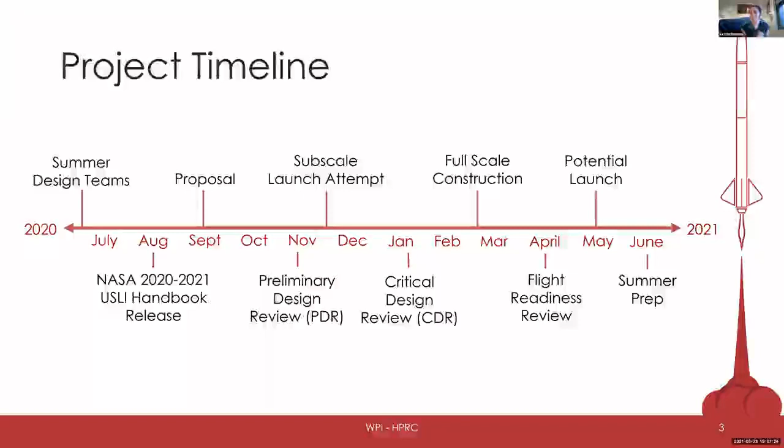Although we are a competition team, there are many goals the team strives for every day. Mission design and execution not only pertains to the requirements set by the competition, but also internal design goals we set ourselves. Each year, the team chooses 1 or 2 new major tasks they would like to add or improve upon to the rocket and/or payload. It is not only important that these designs are well thought through, but well executed.

This provides our members with the full engineering cycle experience, since they see the project from concept all the way through to fruition. Throughout this competition, there are several design reviews, the most recent being the Critical Design Review, or CDR, being 336 pages long. As engineers, it's not only important to create, but also to effectively describe the idea and document its journey. This extensive record of our project can be beneficial in many ways, namely for future members of the team.

Education and engagement is crucial for our team's sustainment and also for the community and members' benefit. The team participates in several outreach opportunities throughout the year to give back to the STEM community. This project is a place where students can put concepts they've been taught in class into practice in addition to learning hands-on. The team holds workshops throughout the year, ensuring that new and returning members alike learn something new and improve on their technical and professional skills.

So I'll be taking you guys through an overview of the vehicle we're launching. This year's rocket is a little less than 10 feet tall and weighs nearly 50 pounds on the pad. It flies on an L-class solid rocket motor, with which we'll reach an apogee of about 5,000 feet.

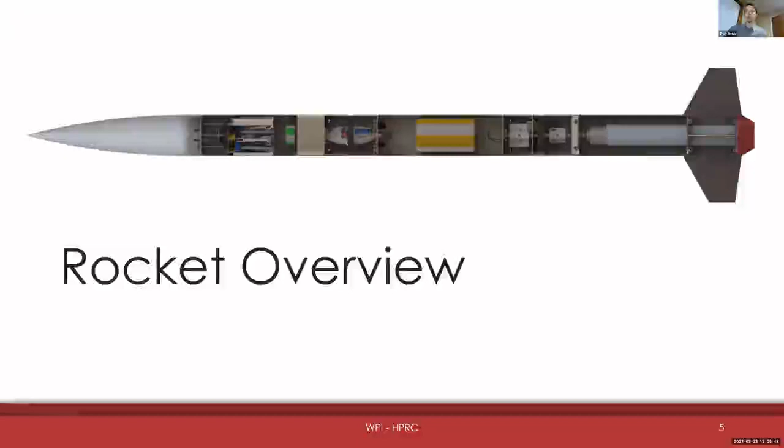We'll get started with the aerostructures team. This team handles all the external components of the launch vehicle, including the nose cone, the body, the fins, and the tail cone. This year we're flying an entirely fiberglass airframe and nose cone with custom carbon fiber sandwich fins and a 3D printed tail cone.

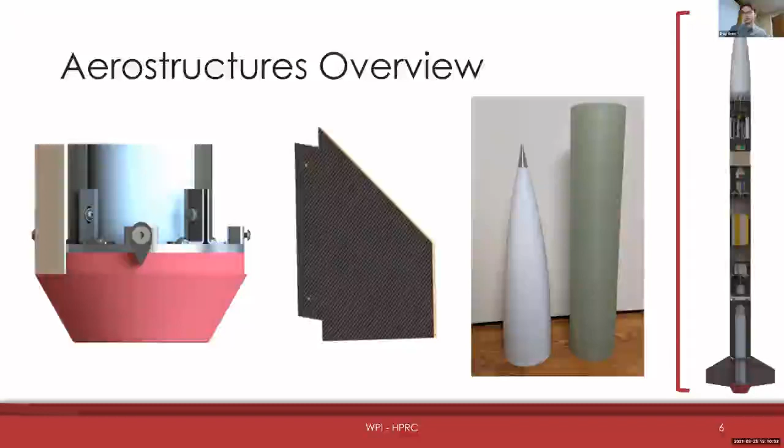The team started off focusing on airframe and nose cone selection. These are commercial components, so it's important to find the right balance of cost, weight, and strength. We attach all of our internal airframe components using bolts rather than the more typical adhesive, so it's important to find an airframe that could withstand those concentrated loads in the bolt holes. In the end, we chose fiberglass, which won out for its high strength, radio transparency, as well as its dimensional stability.

The design of the tail cone is critical to reducing the base drag of the vehicle by offering a smooth transition for the air flowing along the body back to free stream flow. Including the tail cone allows the rocket to fly a bit higher than it would otherwise. We're using a 3D printed tail cone that can both reduce drag and serve as a shock absorber to protect the motor casing during landing.

Some of the most critical components of the vehicle are the fins, which are required to maintain stability and are subject to a challenging aerodynamic environment. To keep the vehicle lightweight, we use a carbon fiber sandwich panel with a plywood core, which offers extremely high stiffness with low weight.

To ensure the fins would not encounter aerodynamic flutter during flight, we estimated their stiffness through classical laminate theory and were able to calculate the estimated fin flutter velocity. We've also recently completed an analysis of different laminating epoxies, which we'll use for our fins, that will guide our choices for fin construction. And we've very recently manufactured our fin cores using the school's laser cutter.

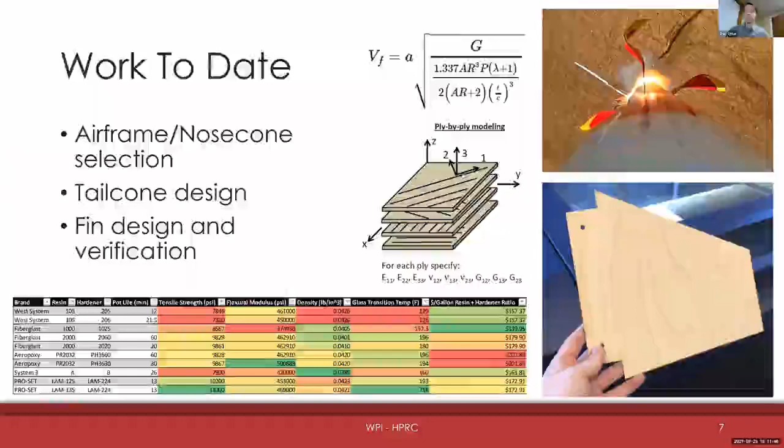Up next for the aerostructures team is completing the composite layup for each fin, followed by a series of fin tests. We plan to measure the bending of the fin in response to an applied load at the fin tip to characterize its stiffness. We also want to measure the twisting response of the fin by applying a known torque at the fin tip and measuring the angle to which it bends.

This test will allow us to determine the effective shear modulus of the fin, which is the critical number for our fin flutter calculations. We'll use that data to confirm our estimations. The team will also be preparing the airframe for integration, which involves cutting the airframe sections to length and preparing each section with bolt and vent holes for component attachment.

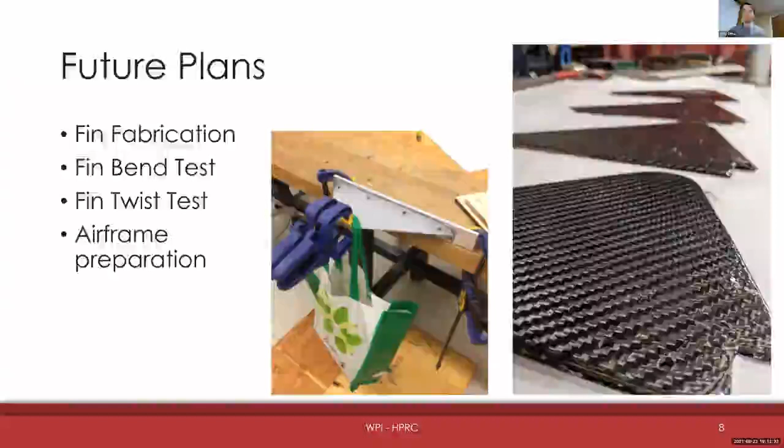Next up is an overview of the propulsion bay, which is located at the aft end of the rocket. The propulsion bay is composed of the fin can and the motor retention system.

The fin can is designed to ensure that the fins remain secure throughout the flight of the rocket. The system consists of 4 fins, 2 centering rings, brackets to secure the fins, and brackets to secure the centering rings, as well as rail buttons and the tail cone.

The motor retention system consists of the thrust plate, those same centering rings, and a motor tube. This system ensures that the motor is secured and centered within the propulsion bay. The thrust plate in particular helps distribute thrust from the motor to the airframe.

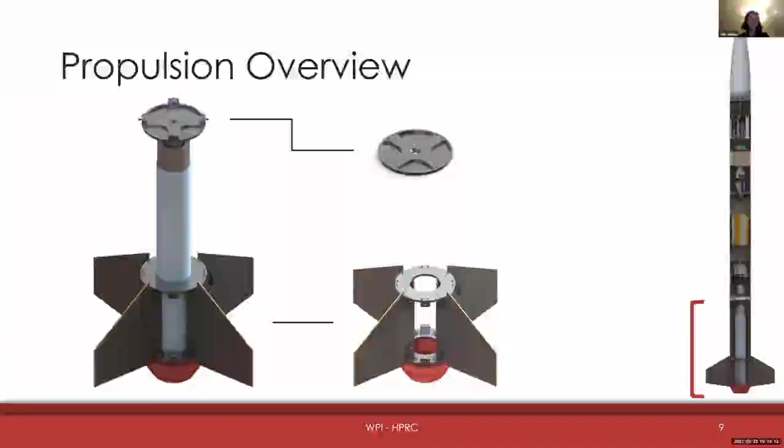Now taking a look at our completed work to date on the propulsion bay in terms of simulation, we have conducted simulation using ANSYS software, especially a static structural analysis on the thrust plate and the radio bracket assembly. Locations of high displacement, von Mises stress, and minimum safety factor were solved for to verify the reliability of our thrust plate.

Furthermore, we're moving on into manufacturing at the moment, and we have made significant progress on completing the CAM needed to machine certain components. Last week, we were able to machine a fixture plate for our thrust plate, and we actually just today finished manufacturing another fixture for another component.

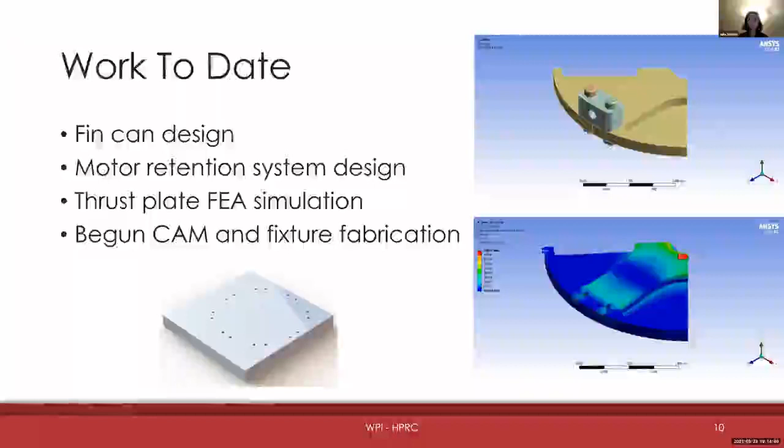Also in the following weeks, we aim to complete any fabrication using a mini mill and equipment in our school shop, and then we will move on to constructing the fin can and motor retention systems.

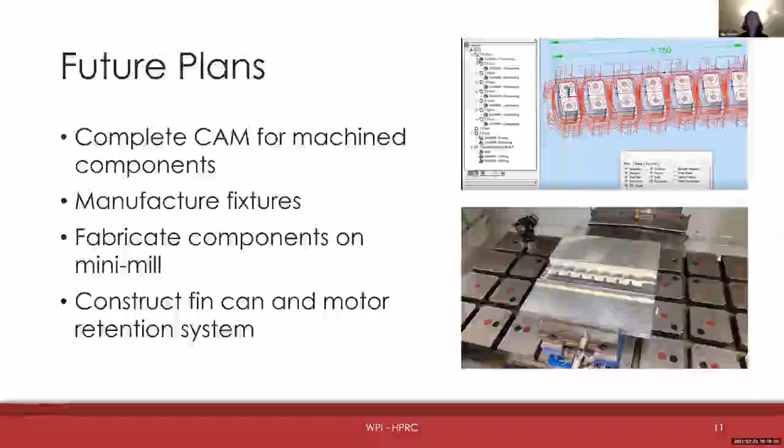The mechanical systems team works on 2 major components of the vehicle: the air brake system and the avionics bay.

The panels are driven outward by a servo connected through a gear system to a cam slot plate. As this plate rotates through 90 degrees, the fins are extended along aluminum guide rails by roller pins that interface with the plate. This system allows for easy variation of actuation speed and torque without any of the moment arm concerns of a slider crank or similar mechanisms.

The avionics bay consists of a central spine which provides mounting points for the air brakes, as well as the avionics computer and battery, and handles the load of the parachute deployment. The bay attaches to the lower airframe using a twist lock mechanism, which makes installation and access at the launch site very easy. The entire system sits within the coupler tube between the lower and middle airframes of the vehicle.

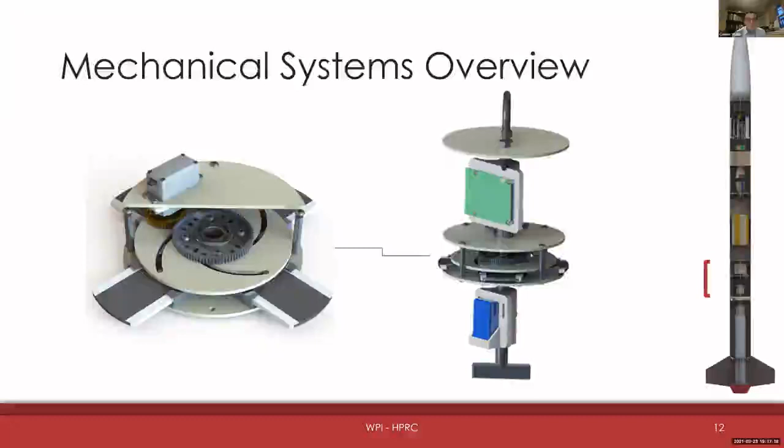As seen on the previous slide, we have a complete design for the air brake system and the avionics bay, as well as a full CAD model for both sections.

A key process we also completed was aerodynamic analysis of our rocket to determine if the air brakes would be effective and in order to simulate the flight. We used SolidWorks CFD to analyze the drag in our simulation to develop our control system, as well as on the vehicle during flight to determine how far to extend the air brakes.

With data on the expected air brake force, we were also able to size our servo to expected loads. We defined a kinematic model of the system and a minimum speed at which we expect the air brakes to operate—in our case, close to full extension in less than a quarter of a second. From this, we could determine an operating region of torque and RPM that the motor must be able to provide and choose our servo accordingly.

We've also completed a prototype of our air brake system, pictured in the bottom left of the screen. This prototype is made to test the functionality of our air brake actuation system before we cut the final plates out of fiberglass. From this prototype, we learned that we needed to adjust the fin rail slightly to allow the fins to properly slide through the PTFE, and that we needed to modify the attachment points for the actuation gears in the gear system.

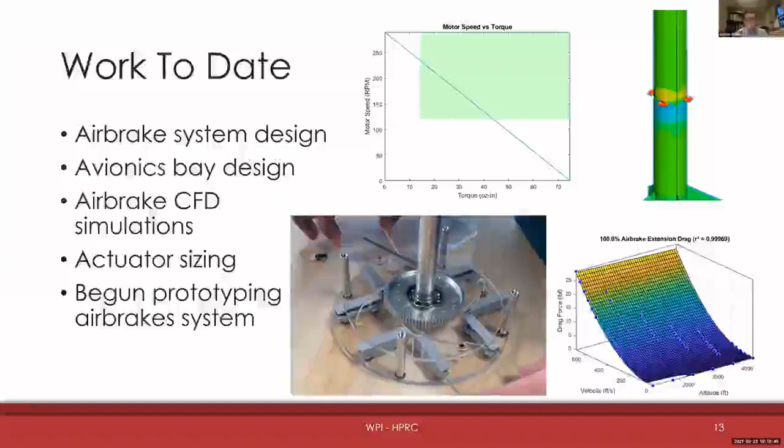In the coming weeks, we will be modifying our design to incorporate the necessary changes found during prototyping. Once these changes are made, we will start getting our structural and actuation plates water jet cut out of fiberglass, along with the fins cut out of carbon fiber. We will also be machining the major components of the avionics bay and the fin guide rails out of aluminum, and all the plastic components will be 3D printed before assembly.

Once manufacturing is complete, we will begin assembling both our air brake system and our avionics bay. We then plan to test the air brake system on the ground, loading the fins with weights to test the strength of the mechanism, as well as incorporating it with the avionics system to complete hardware-in-the-loop testing.

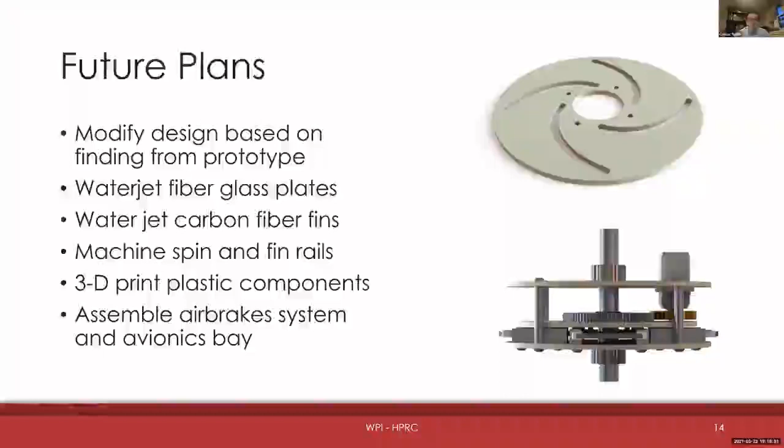Next, we will begin discussion of the avionics system. The avionics bay is located at the coupler between the middle and lower airframe sections and serves two critical functions for our rocket. The first is to use an array of onboard sensors to collect flight data and transmit live telemetry during flight. The second is actuating the air brake system to help the vehicle achieve its target apogee. The final system will be controlled by the team's custom flight controller software, and all electronic components will be integrated into a custom printed circuit board of our own design.

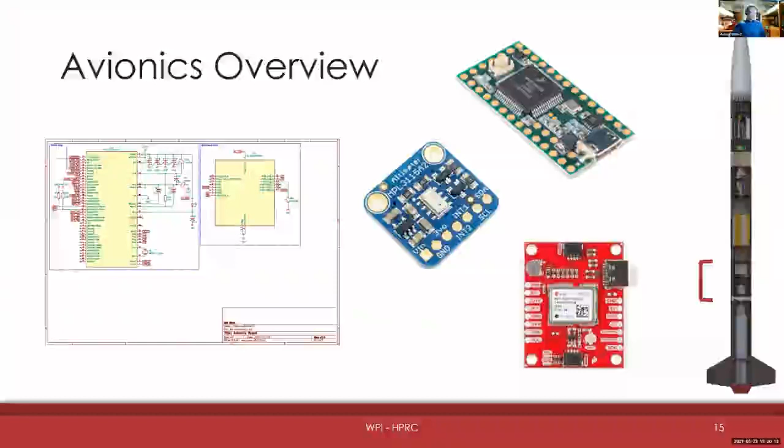Moving to the next slide, we'd like to share our progress to date. The avionics system will be controlled by a Teensy 3.2 microcontroller, which will interface with a number of peripheral devices to meet the team's objectives. Several sensors will be used, including an accelerometer, gyroscope, magnetometer, and barometer to measure the vehicle's heading, altitude, and acceleration. A GPS is also included to track the rocket's position and velocity during flight.

Could you go back one slide? That slide wasn't done yet.

As for the software running on the board, we've been developing that in collaboration with the electrical and programming team on Payload. It's being written in C++ to interface with all the peripherals using various serial protocols, specifically I2C and SPI. It will also manage things like detecting what state the vehicle is in and how it should be reacting at each given time.

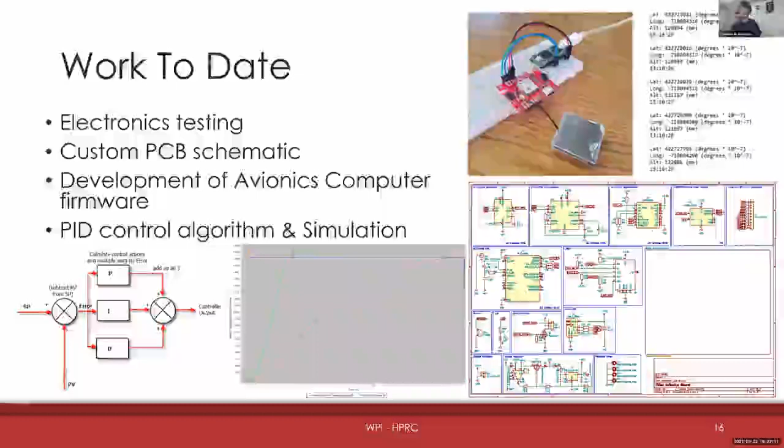As far as future plans go, we plan on finishing up our PCB layout so that we can have it manufactured and tested. This involves doing some routing and making sure everything's connected up and that we've designed something safe. Then it can be sent out to a board manufacturer for manufacturing and SMT assembly.

As far as software, we'll be continuing to finalize our code, writing more system state management, as well as hopefully doing some hardware-in-the-loop testing once we have the actual hardware. Lastly, once that's done, we'll be implementing the control law designed in simulation onto the actual board so it can be tested with the full board and the full air brake system.

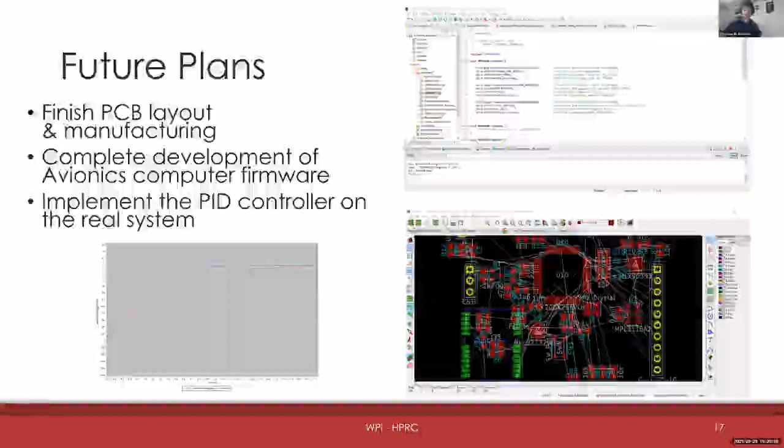The purpose of the recovery system is to safely land the rocket within certain descent time, drift distance, and impact velocity parameters. Our recovery system is a two-stage system with a drogue parachute released at apogee to stabilize the descent of the vehicle, and a main parachute released at 600 feet to reduce the descent time for a safe touchdown.

This dual deployment system greatly reduces descent time and thus drift distance over a system which deploys the main parachute at apogee, and reduces shock loading when the main parachute deploys compared to a system with no drogue parachute.

Recovery events are controlled by two redundant altimeters, which ignite black powder charges that separate the airframe and release the parachutes. All the recovery electronics are housed in the recovery bay between the middle and upper airframes. This bay also connects the upper and lower sections of the vehicle through nylon shock cord attached to each section.

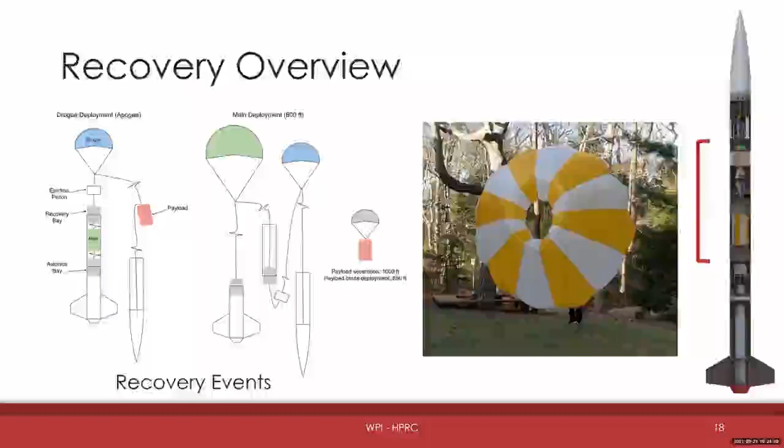The design of this system began with the structural design of the recovery bay, which consists of a central aluminum spine with adapters to U-bolts on each side, which will connect to the parachute hardware.

To ensure the spine and adapters would handle the expected loads, we ran FEA simulations on the main components with expected parachute deployment shock loads. We calculated these loads by conducting a numerical simulation, estimating the parachute opening time and inflation area using standard methods.

We designed and 3D printed an electronic sled that fits around the central spine and holds the altimeters, batteries, and arming switches. By using two altimeters, we reduce the chances of recovery failure, which is one of the most common causes of rocket failure. Adding to our redundancy is the use of altimeters that detect apogee by different methods.

Our primary altimeter detects apogee based on barometric pressure sensors, while our backup altimeter uses an inertial measurement unit. These systems have recently been assembled onto the sled, and tests on the altimeters are ongoing.

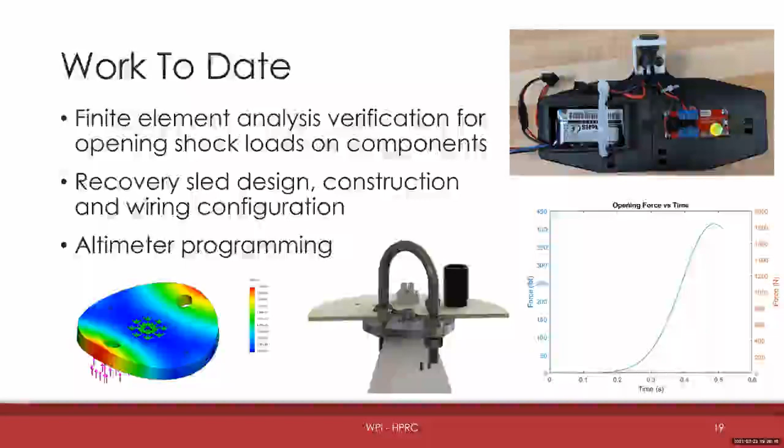The next steps for the recovery system are to complete recovery bay assembly and to finish wiring and testing the redundant altimeters and arming switches. Once the recovery bay is fully assembled, we can proceed with larger scale testing.

This includes pad endurance testing, where we ensure our recovery system can still function after an extended period of time in the armed configuration, and critical ejection testing, which informs us how much black powder we will need to successfully separate the vehicle sections in flight.

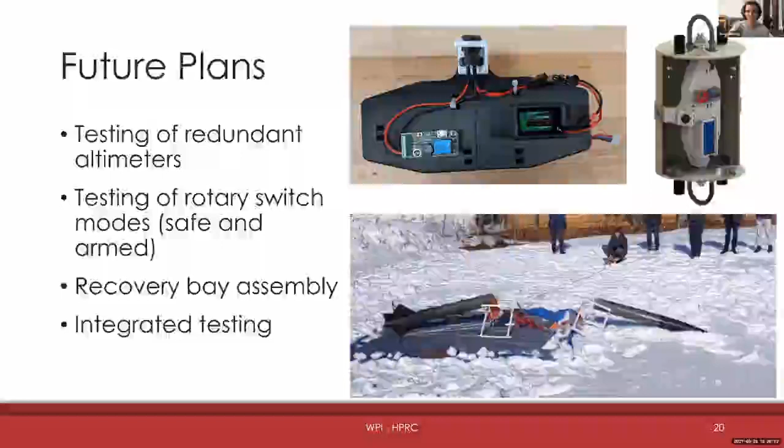In order to complete this mission, we split the payload into 4 subsystems: retention, self-righting, stabilization, and electronics/programming. Each sub-team of payload is responsible for one of these subsystems. Our payload is approximately 5.95 inches in diameter by 8.61 inches long and weighs roughly 5.68 pounds.

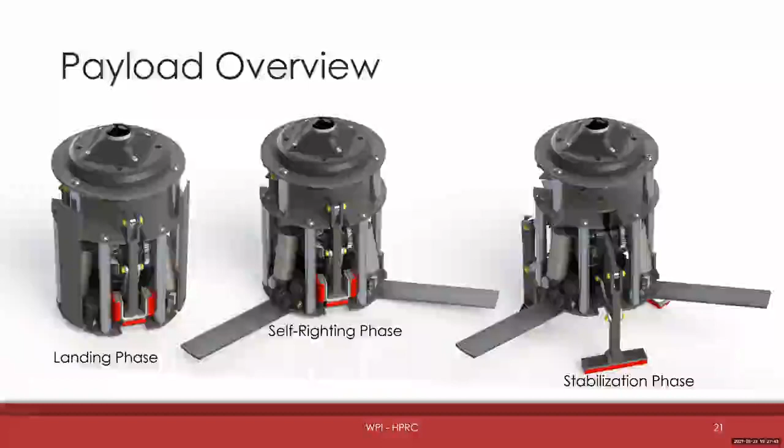Here we begin the retention overview.

The payload retention system is designed to safely retain the payload during flight, separation, and landing operations. The system consists of 4 separate mechanisms: the alignment pins, the tender descender, the chute release mechanisms, and the rotary latch mechanism. The payload is axially and rotationally retained during flight through 4 alignment pins located in the upper airframe that slot into the payload's top section.

When the airframe separates to deploy the drogue, the payload is also pulled out of the upper airframe. The payload is retained to the rocket after drogue deployment via the tender descender. The tender descender allows the payload to remain outside the rocket's airframe where it can be released at the desired altitude.

The tender descender assembly is how we detach the payload from the rocket during descent. This subassembly consists of the tender descender and an altimeter to trigger the mechanism. At 1,000 feet AGL, the altimeter triggers the tender descender to separate, thus releasing two metal quick links as shown. This allows for the shock cord of the payload to detach from the shock cord of the rocket.

The payload descends until two redundant Jolly Logic chute releases allow the parachute to deploy at 850 AGL. The parachute controls the descent of the payload till landing. Upon detection of landing, the payload's electronics trigger a rotary latch to actuate, releasing the shock cord that tethers the parachute to the payload. With the parachute detached, the parachute is free to deflate away from the payload vehicle, reducing the chance of entanglement.

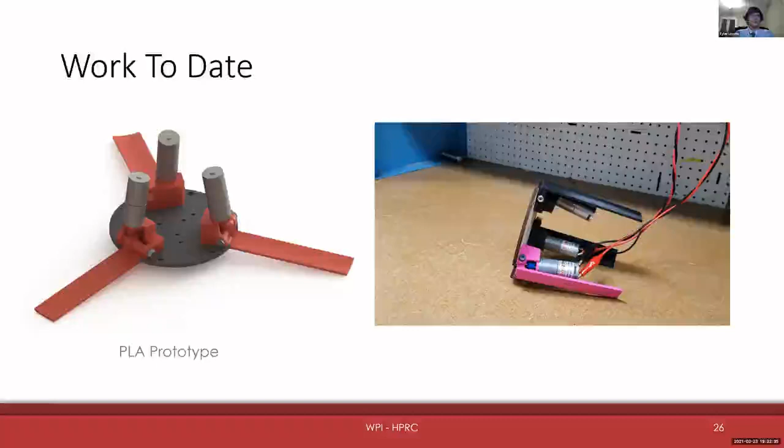And on the right, there's a video.

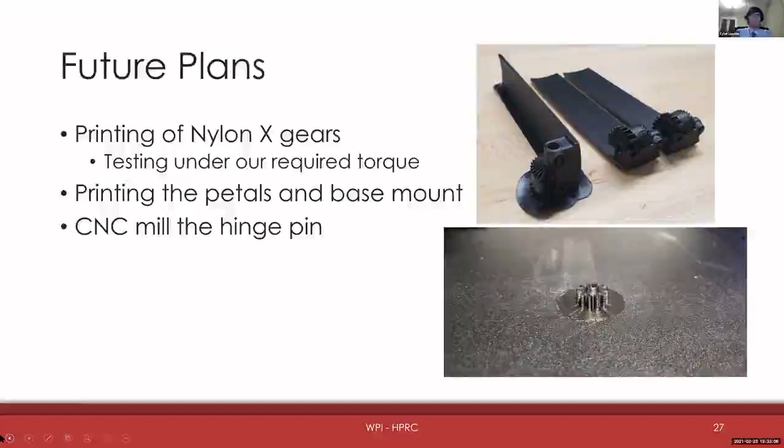For the next steps for this system, we're beginning to print our parts with Nylon X, and we'll want to test the bevel gears for stripping when subjected to the motor torque, as it's relatively high. We also want to test their ability to fully extend and retract the petals. We've printed the entire petal part and plan to print the base mount soon, then machine the aluminum shaft so we can begin assembling the entire system for further testing.

The stabilization system's objectives are to bring the payload body to within 5 degrees of vertical and to provide a stable, elevated platform for the payload camera to take a panoramic picture.

The modules are mostly made of 3D printed PLA and Nylon X filaments, although some parts will be machined out of 6061 T6 aluminum. Each module uses a parallel 4-bar linkage designed to support the entire payload's weight, with a factor of safety of around 1 3/4.

A parallel 4-bar linkage was chosen over, for example, a vertical linear actuator due to its reliability, simple motion profile, and its familiarity to members of this team.

The gears will be manufactured out of aluminum using electrical discharge machining in WPI's machine shops.

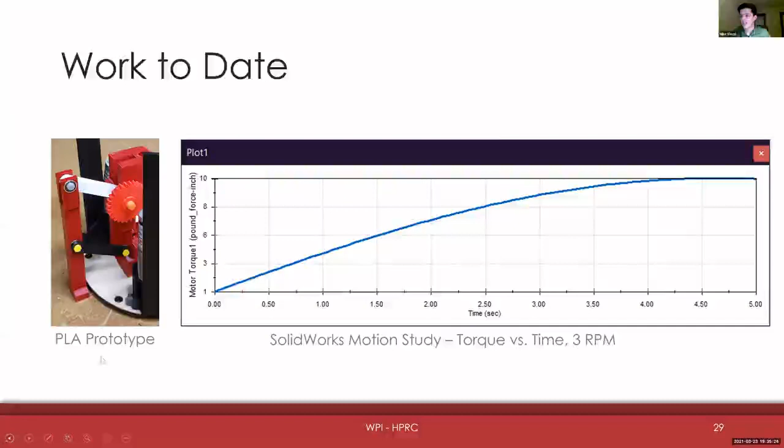Julia, could you play that real quick? One more. There we go. Oops. There we go. All right.

Finite element analyses were also run on the aluminum parts in SolidWorks, which allowed us to find the areas of maximum stress and account for them.

Some prototyping was also done, as can be seen on the left. 3 prototypes of the stabilization system were made out of PLA, which were then used to check the design itself and to test the stabilization code.

Although the prototype mechanism was imprecise in its movements and the gear servo mounting was sloppy, these problems stem from the imprecision of 3D printing rather than issues with the design itself. Since some of the relevant parts of the mechanism will be aluminum on the actual payload, we can use more precise manufacturing methods to create well-fit parts that will eliminate most of these problems.

Finally, qualitative testing was performed on different foam composites. A variety of these different composites were tested for the best balance between compressive resistance, flexibility, and ground conformity. Of the 16 composites tested, cross-linked polyethylene outer layers and a polyurethane inner layer worked best for our purposes. Since quantitative testing will be performed, the exact dimensions and material properties that the composite requires are currently unknown.

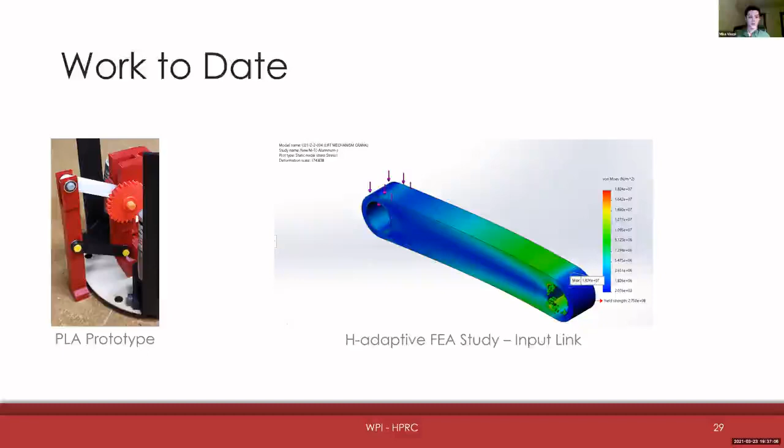Next steps for the subsystem include manufacturing, assembly, and testing, not necessarily in that order. Currently, we have successfully printed all PLA parts, and we're working to get the aluminum and nylon X parts finished as soon as we can. Once all the parts have been manufactured, we'll begin testing individual components, mainly the system's sensors, the foam composite, and possibly some 3D printed parts. After the specified components have been tested, a single stabilization module will be assembled and tested on its own. Once the individual assembly has been tested, 3 modules will be integrated into the payload, and the whole system will be tested.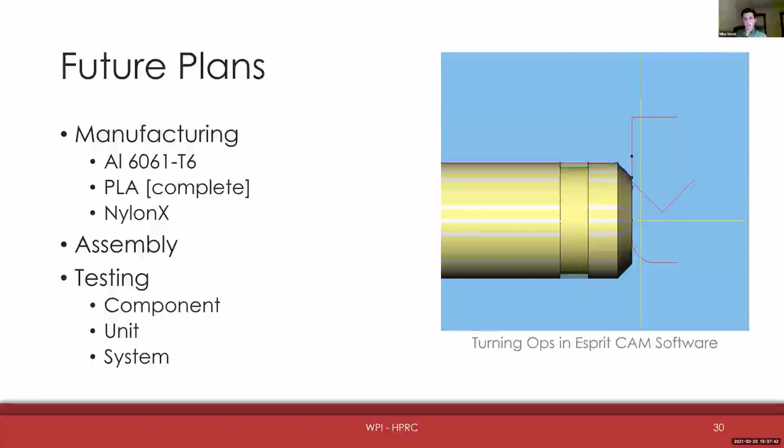All right, we'll now begin an overview of the payload electrical system. The electrical and software subsystem is responsible for controlling all the actuated mechanical parts of the payload, which were just previously described. We use geared DC motors primarily and their respective controllers with feedback from rotary encoders and limit switches in order to properly actuate these mechanisms.

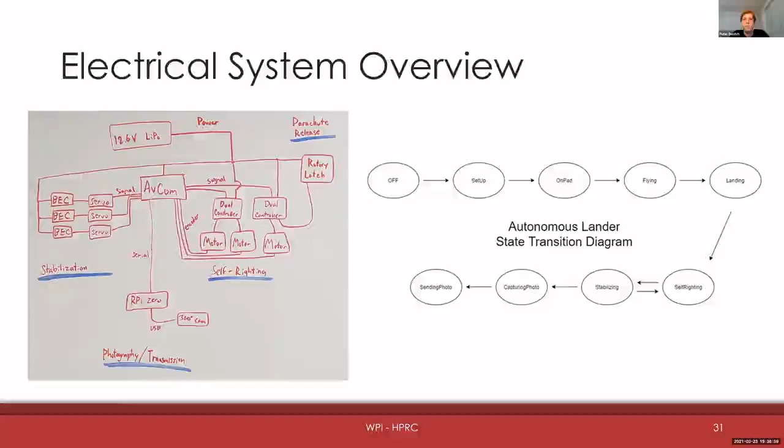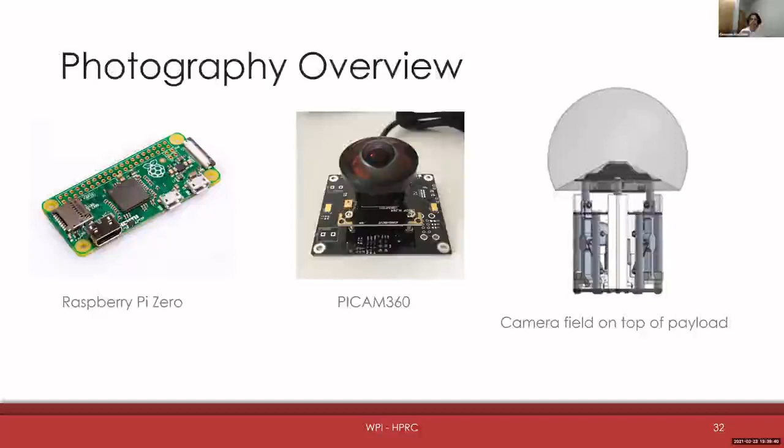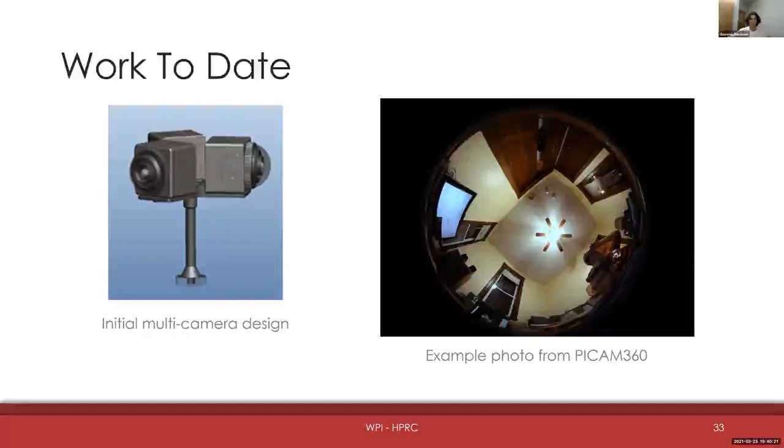To develop and prototype the overall electrical subsystem, we started out by researching components based on the desired specifications. Our original design used an Arduino Nano for our main processor, but we ended up switching to a Teensy 3.2 since it's faster and so we could develop alongside the avionics team who also uses a Teensy.

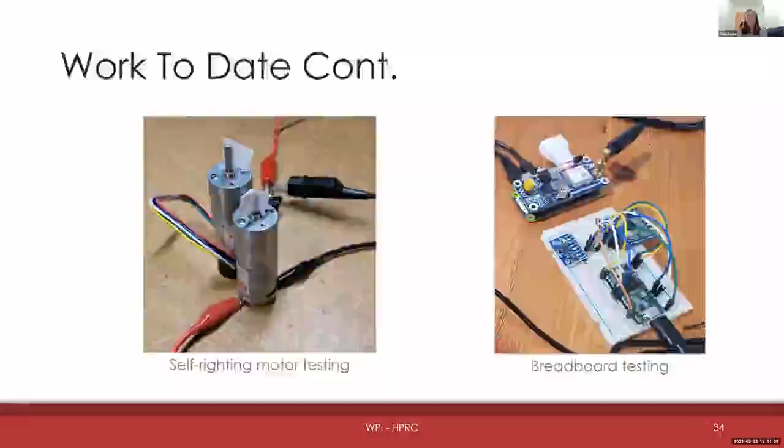Now, with the conclusion of our technical design, I'd like to give a brief overview of our team's safety practices. Safety is the highest priority of WPI HPRC and plays a central role in all team activities and decision-making. The club has a designated safety officer responsible for educating team members about safety and ensuring all safety guidelines are met. To promote a culture of safety, members must agree to a safety contract and attend a mandatory safety briefing.

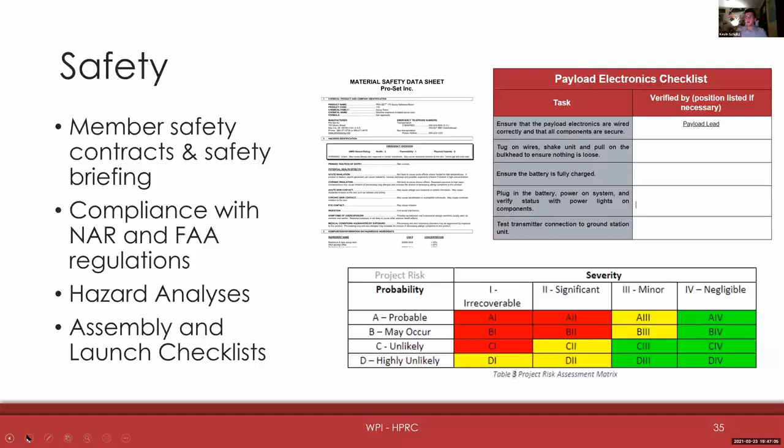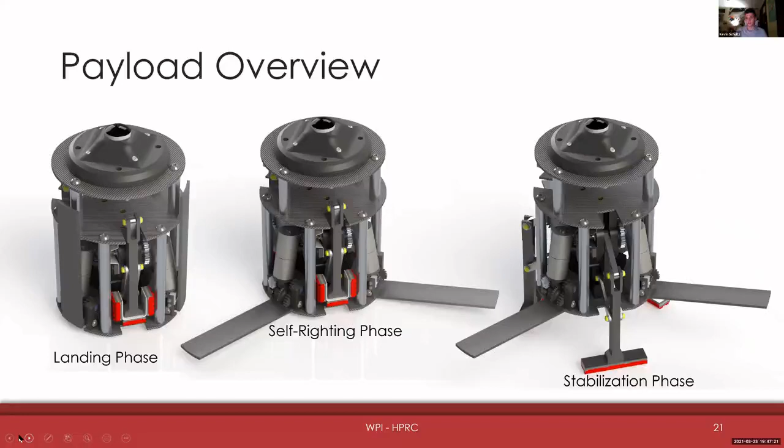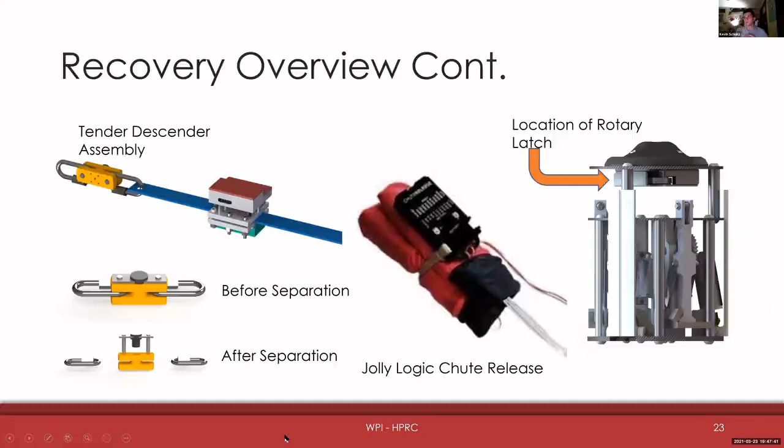Sorry, no, the slide before that one, Julia. I don't know why they're both labeled 23 on my end. Oh yeah, so 22 now.

So see those two rings on the tender descender? That's where it separates at that block. And then the parachute on the payload, we've also chosen such that it will tend to land more directly downwards. We chose a polyconical parachute for that. The parachute on the payload is designed to just land and fly away. The rocket itself, deploying after the payload is detached and at a lower altitude, will actually separate the two when they land on the ground.

Okay, one last question, and thank you for your answer there. Everything, of course, is above ground level, and you're measuring inertial coordinates, and also barometric. So at some point, do you have to put in the ground altitude into your computer before you launch, so that if you're launching at White Sands at 4,000 feet, or at some other place at 6,000 feet, you don't crash because the whole thing has the wrong data?

Exactly. So one of the things we can do is there is a calibration in the altimeters. I believe off the top of my head that the actual barometer of our primary altimeter only requires a recalibration after some change in altitude. And I think we zero it out at the actual field. Some of the older members who have experience with the altimeter might be able to correct me. So for the commercial altimeters you're talking about, right? Yeah, those, as soon as they're initialized, they zero themselves out. There's no manual zeroing process that we do. That's just part of their design, such that they're as simple as possible to use for average rocketry people.

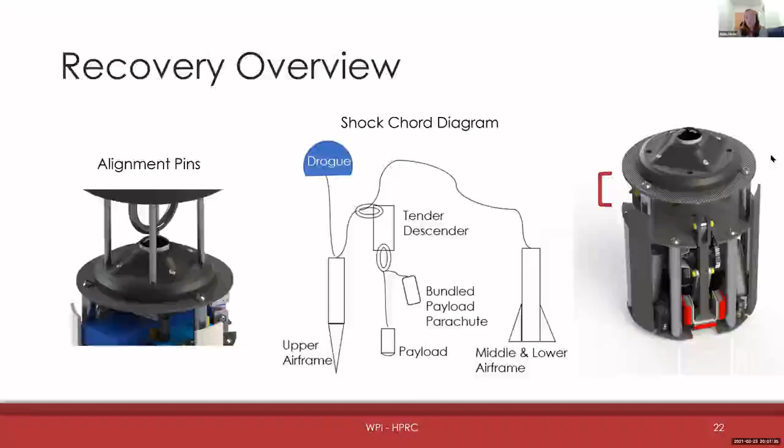Right, yeah, thanks for your question. Each petal, each of the three petals for the subsystem has a potentiometer on the motor, and they're not pictured in the presentation, but they are in our CDR if you would like a copy of that.

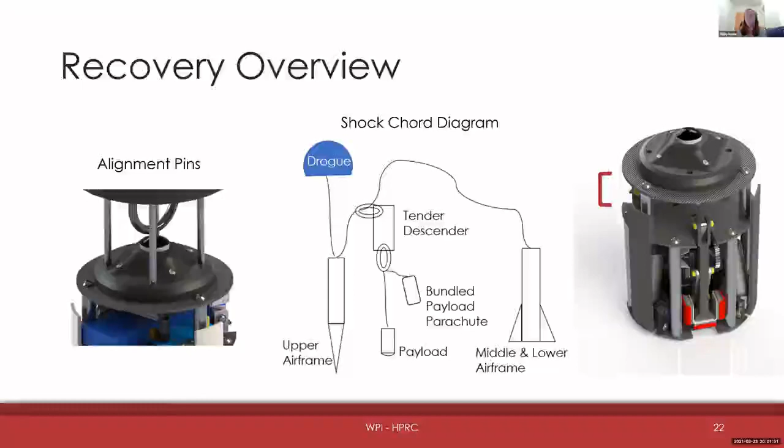Yeah, I mean, we can try and point it out on the slides for you, actually. If you want to go hop to slide 25. At least on the self-righting arm, we have one that's a gear ratio off of the main petal.

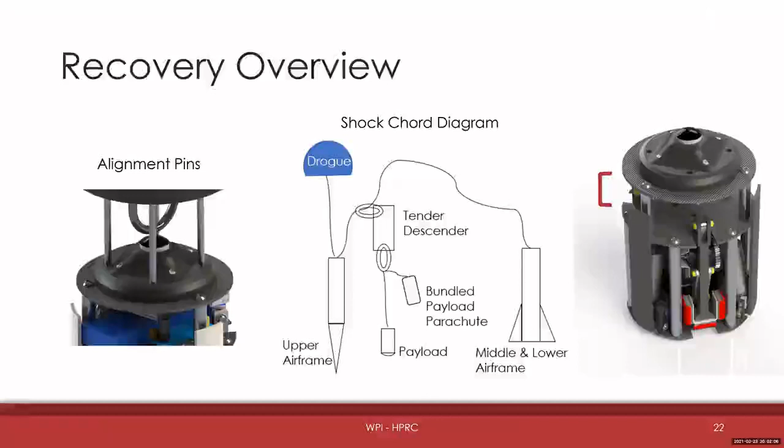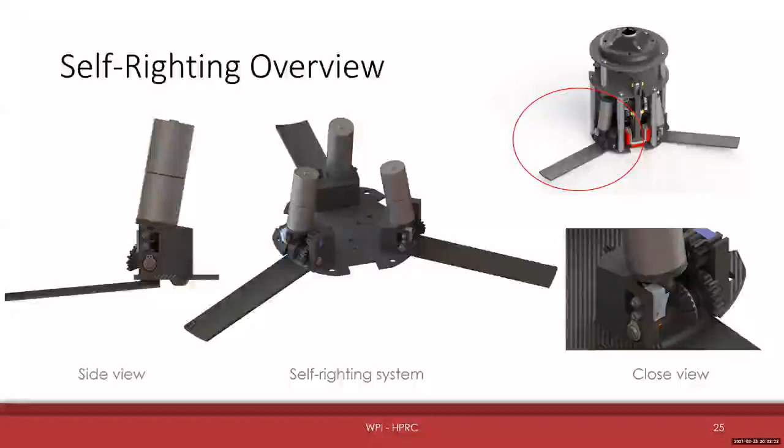So it's a gear-driven potentiometer is what you're using as an encoder? Yeah, there is a reduction between the petal and the potentiometer. It's mainly for spacing. You can see in blue in the close view image, that's where one potentiometer is located. And then I don't know if we have a good picture of the one on the stabilization arm. We don't, but the potentiometer in there is located on the crank drive shaft, so it directly reads the rotational position of the crank.

Okay, the motors, these are I guess open loop motors, they just turn in a particular direction based on their brushes. They're brushed motors, so they just turn in whichever direction the voltage is applied. Is that the system? The self-righting DC motors are that, the stabilization system actually uses a continuous rotation servo.

Excellent, great. You guys have quite the eclectic mix of designing and talent problems to solve, and that's, I can understand why the team is so large. Quite a bit of a project. Good work.